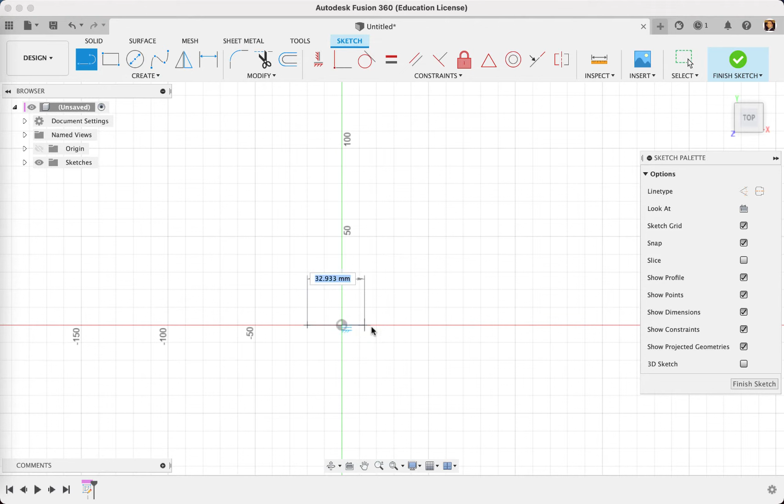Start with a sketch by clicking Create Sketch and then the X or bottom plane. Here I'll just scroll out and make a rough sketch of what I want the base of my door stopper to be or look like, starting with a flat edge and then a zigzag formation on the other side, making it roughly 100 millimeters or 4 inches.

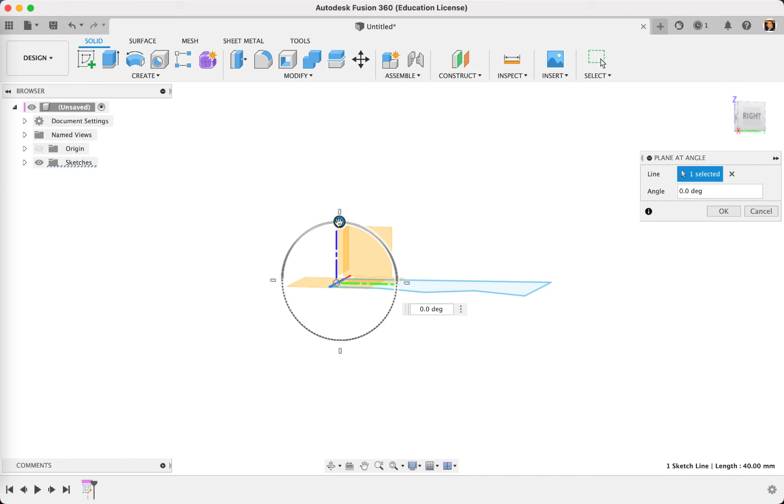Click Finish, and now we'll make a plane at an angle. Select the blue or y-axis, or it could be the x-axis. Drag that wheel around until you get to 15 degrees. If you want a steeper or more shallow incline, adjust that number. Click the plane, then click New Sketch.

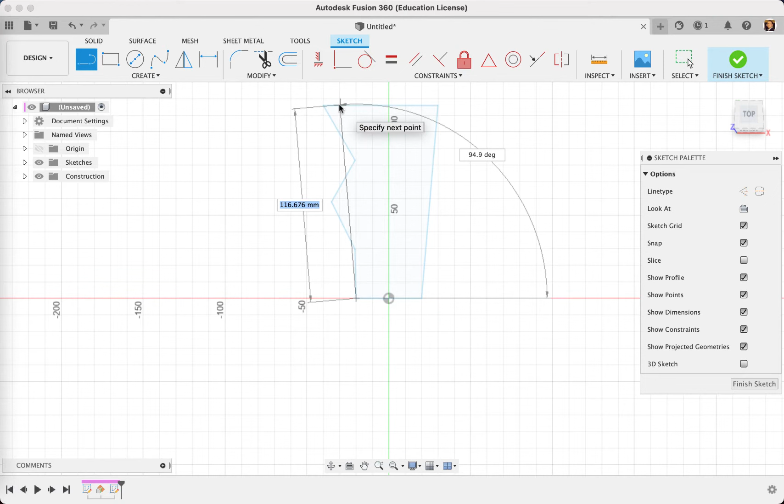Now kind of doing the same thing, but I'm going to give it a little bit of flair and make it on the other side. So a flat edge, some zigzags, and come right back to that initial line. Now that I have two planes, you can see how this shape takes shape.

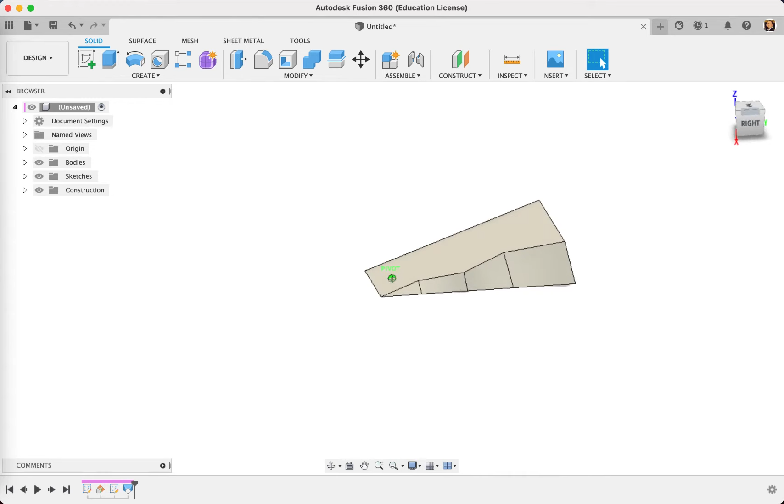I click S for search and then find the Loft feature. It's also under Create or Modify. Click both planes and click OK.

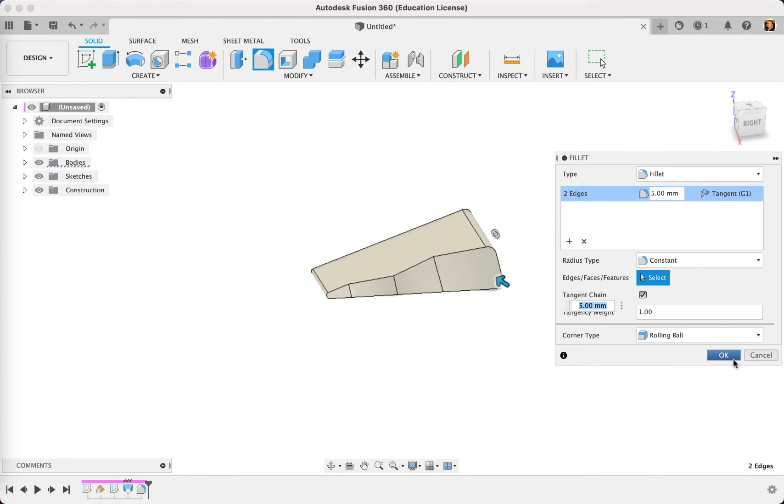Now just to round out some of these harsh edges, I'm going to use the Fillet tool by pressing F on the keyboard. It's also under Modify up in the toolbar. Then I'm just going to go around and choose the rest of my edges and give them all a shape.

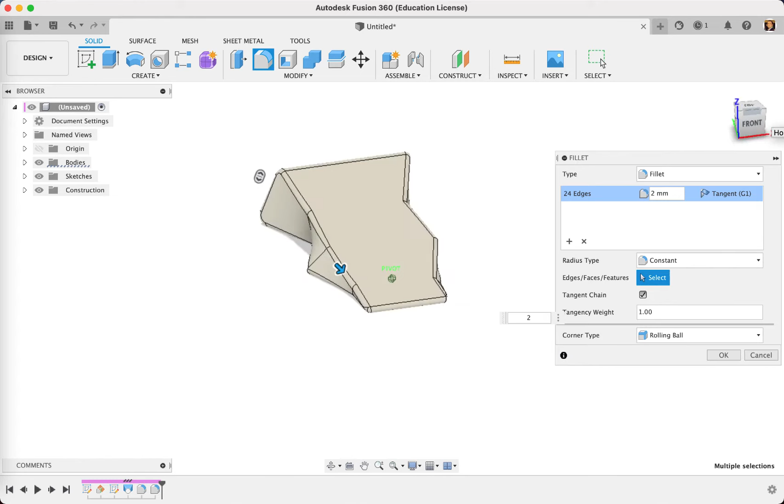Now we're ready to send this to the printer, so we need to export it for 3D printing by clicking Tools, Make, and then 3D Print. The default settings are fine.

I don't open it in the 3D Print utility. You want to save it to your hard drive so that you can upload it to the Polar Cloud. Give it a name.

Here, log into the Polar Cloud and then click Upload. Now I'll go find that file I just exported from Fusion 360 and click Upload.

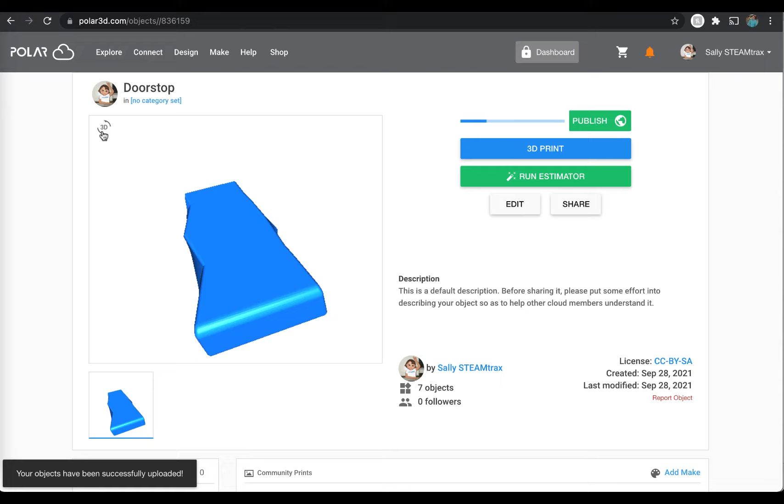Let's go view the object. I will use the 3D viewer just to make sure everything looks good. It does, but I want it to look like a doorstop from my thumbnail, so I'll reposition it and click the camera icon to start a new snapshot.

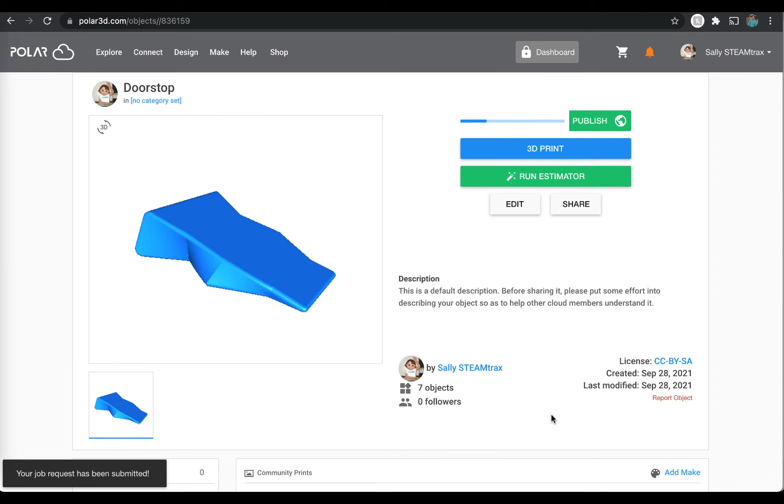Then I'll click 3D print and send to my school. I'm choosing a random school. If you have multiple schools or groups, you'll see them here. And then that's it. If I'm not printing the object, my teacher or print manager will take the object, slice it as shown, and make sure everything looks good before sending to the printer.

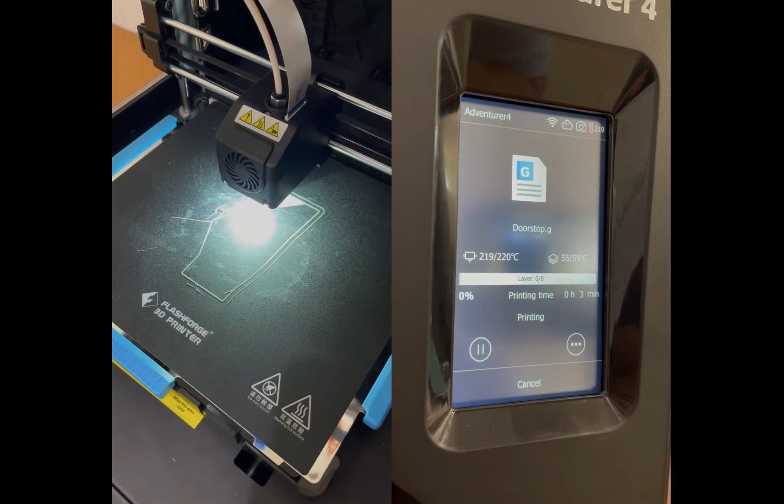Here we're printing this doorstop we just designed in Fusion 360 on the FlashForge Adventurer 4, and the plate makes it so easy to get these parts off. And we're done.